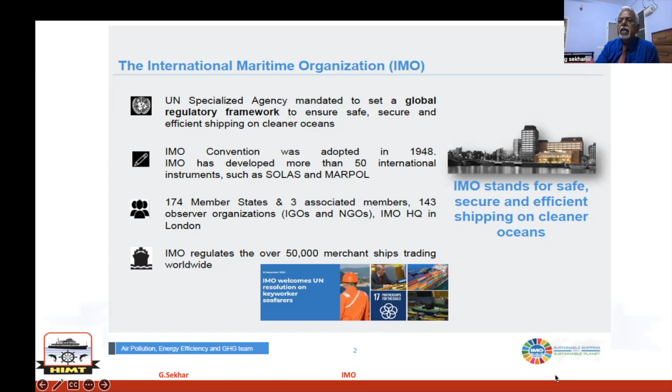But what IMO does is only give guidelines to the shipping industry. The implementation part of it rests with the flag state. So individual flag states need to comply with the requirements of IMO's conventions.

As you can see, this mission statement of IMO is very clear - it's a specialized agency of the United Nations. As you can see, standards of maritime safety, security, efficiency of navigation, and of course pollution control, as well as related legal matters. That's why one of the major committees of IMO is the Legal Committee, apart from your MSC and MEPC, for effective implementation of IMO's instruments.

That's the reason IMO has started auditing flag states by bringing in chapters in both SOLAS and MARPOL, what they call verification of compliance. So IMO is now taking on that role also.

In this slide, you can see how it all started. Look at 1990 - how much is the quantum of cargo carried? I hope you are able to read this - 4,008 million tons of cargo, shown here in orange color. And the CO2 emission - how much is it? 562. Whereas in 2020, almost 2 years back, the cargo quantum has increased threefold, three times.

11,019 million tons of cargo, and CO2 emission staying somewhere around 1,056. You will see the gradient till almost 2010 - this blue line is your CO2 emission and orange line is the quantum of cargo carried. Both go hand in hand, the gradient, the angle is the same.

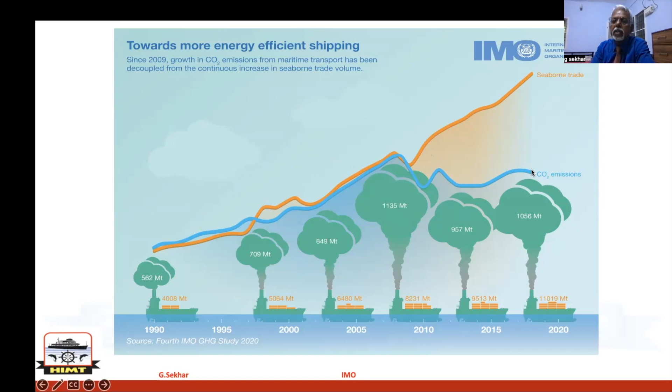But at 2009, 2010, with all the new regulations brought by IMO as Chapter 4 of MARPOL Annex 6, what they call the energy efficiency chapter, they are now able to flatten the curve instead - this is the cargo quantum and this is the CO2 emission. So now they are able to just flatten the curve. But the long-term target of IMO is to make the CO2 probably come down to zero. That's how they are now looking at it.

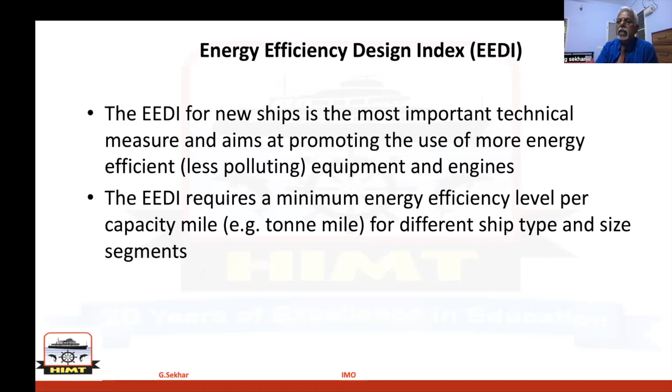Yes, we all know that. So the factors considered are the quantum of cargo carried and the fuel oil quantity consumed, which directly relates to the CO2 emission from the fossil fuel we are using, like IFO, MDO, or MGO, and apart from that, the distance traveled during the voyage. So the formula is given, and both the attained EEDI and the required EEDI are always checked. We always expect the calculated attained EEDI needs to be less than the required EEDI.

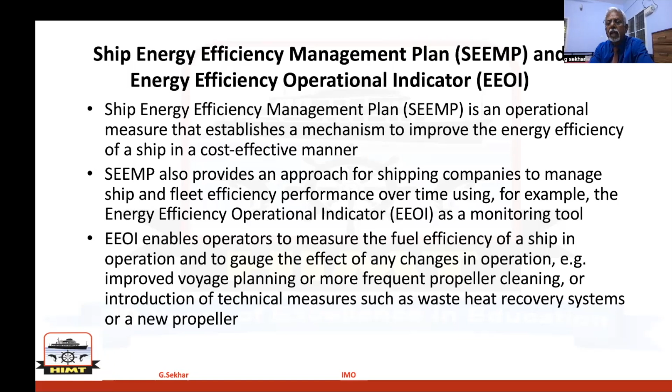So that's about EEDI. And of course SEEMP, and another operating factor we are using as of now on board ships is the Energy Efficiency Operational Indicator, which can be used for any type of ship, whether existing or new. That just enables us to measure the fuel efficiency of a ship, so that if we carry out any improvement methods like improved voyage planning, underwater hull cleaning, more frequent propeller cleaning, a new propeller fitted, or waste heat recovery system improvements, we can see how efficiency improves. So all this is the EEOI which we are very familiar with.

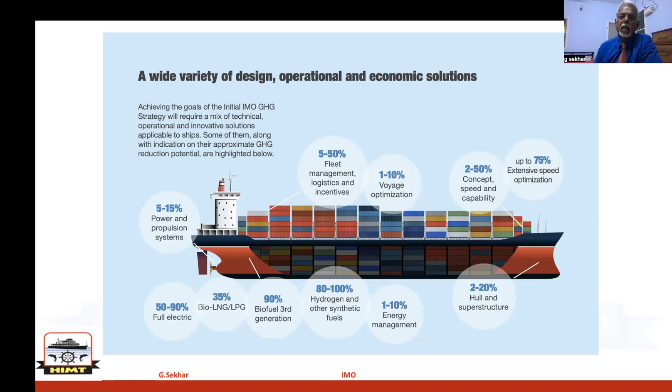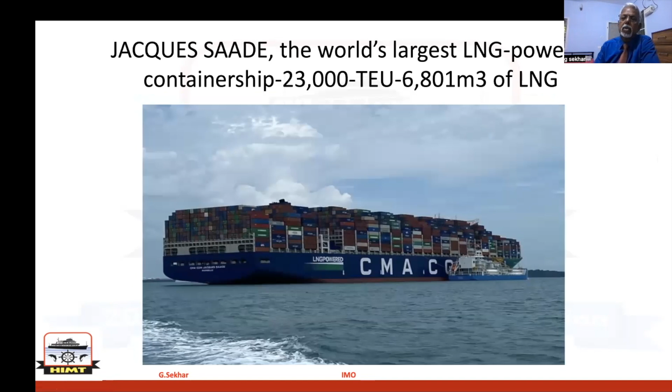Or you can look at this particular ship - it's an LNG powered container ship. It's massive, about 23,000 TEU. The capacity of bunker tanks is about 6,801 cubic meters of LNG.

As I have said, usage of LNG is only the initial step - the reduction you get is only about 25%. But our focus is to completely decarbonize, meaning we need to go further. Should we use ammonia as fuel or methanol as fuel?

Yes, methanol, I mean ammonia fuel is being tried out, and probably new ships will be coming out. A lot of research and development is being done, and they are looking at using the green ammonia concept - NH3, that's what we need. Nitrogen from atmospheric air and H from the water. The processing will be done, and the green ammonia concept is being pursued, with a lot of R&D being done.

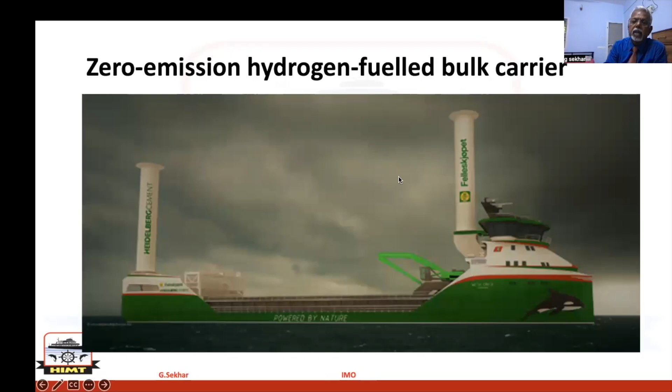Energy will also be harvested directly from the wind through large rotor sails. You can see those rotor sails here - one in the front, this is what we call a Flettner rotor, one right forward, one further up. These are all exploiting wind energy and wave energy. The vessel also has the ability to store excess energy in batteries. This type of development, this greener energy concept, is taking place.

Now let's go back and briefly look at MEPC 75, the short-term measures approved. What they were talking about for 2023 is that for all existing ships of 400 gross tonnage and above, your EEXI certification should be in place. We now have hardly 3 months to go until 1st January 2023.

The comparison is 2008 versus now, 2023. One measure is your EEXI certification - achieved through retrofits, adding shaft generators, reviewing waste heat recovery methods, VFD installations (variable frequency drives), or propeller cap installations. These arrangements reduce fuel consumption, and this is all for existing ships as a retrofit - what you will be able to review and improve upon. That is your EEXI certification.

When looking at CII, the carbon intensity indicator, a lot of operational issues come in - hull cleaning, propeller polishing, voyage planning, weather routing. These are all the operational issues that will get your vessel graded after the survey.

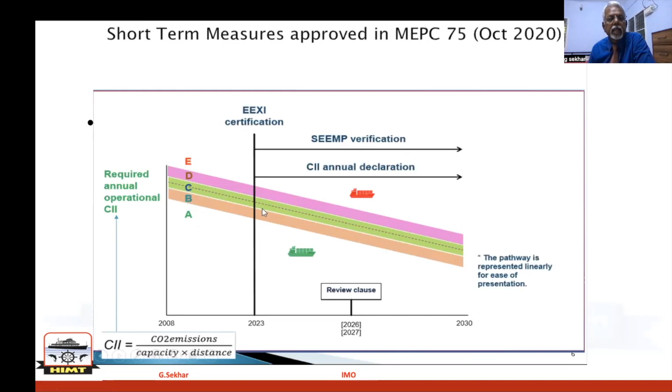Your vessel will be graded A, B, C, D, or E. If you are A, B, or C, you are all right - that means your attained EEXI is less than the required EEXI. If you get D or E, that means you need to do some review. If your attained EEXI is less than the required EEXI, you are fine under your EEXI technical code and International Energy Efficiency Certificate, the IEE.

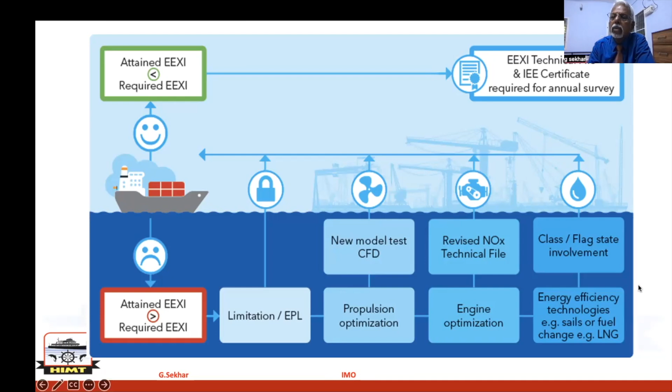But if your attained EEXI is more than the required, that means you are emitting more CO2. So what needs to be done? You need engine power limitation, propulsion optimization, engine optimization, energy efficiency technology, sails, or fuel change - whatever the ship owner of an existing ship needs to consider. Your flag state and class will be involved, providing guidelines to the ship owner on how to improve things to reduce CO2 emission.

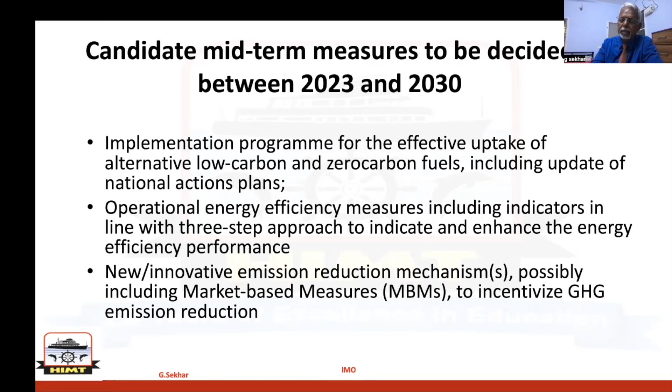Now the mid-term measures, between 2023 and 2030 - EEXI and CII - this is how they plan it: effective uptake of alternative low carbon, zero carbon fuel, which I mentioned, and operational energy efficiency measures, a three-step approach to indicate and enhance energy efficiency performance. Of course, market-based measures for emission reduction mechanisms, to incentivize ships emitting less CO2 - they need to be given some sort of incentive. These are all things in the pipeline which they have recently reviewed.

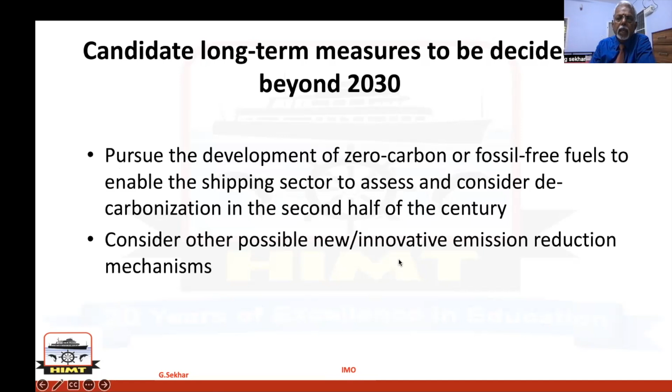Beyond 2030, these are what they call long-term measures: pursue the development of zero carbon or fossil-free fuel, as I've mentioned - fossil-free meaning 100% decarbonized, using hydrogen, ammonia, methanol. And of course, consider other possible innovative emission reduction mechanisms.

Now, in November 2021, MEPC 77 took place. Here IMO agreed to revise its strategy, review and adopt revised guidelines for its short-term and mid-to-long-term greenhouse gas reduction measures, but held short of committing to zero greenhouse gas emissions by 2050 - short of committing to the goal of complete decarbonization by 2050. Now it's 2022, meaning reviews in 2030, 2040, 2050 - probably by 2050 they may get rid of fossil fuels like IFO, MDO. This is the plan.

Now, if you just look at the 78th session, which was done between 6th and 10th of June 2022, the MEPC in IMO looked at these points discussed during the session: revision of the initial IMO greenhouse gas strategy, which was reviewed and revised with midterm new proposals, updated guidance on EEXI and CII calculations, and reporting of EEXI and CII values to the data collection system of IMO, which has been there since March 2018.

This is in line with what we call EU MRV. As far as the European Union is concerned, the European Council has come out with regulations that you need to have EU MRV in place, and then you need to have a document of compliance under EU MRV. Your IMO data collection system is very similar - there they call it DOC, but IMO calls it SOC.

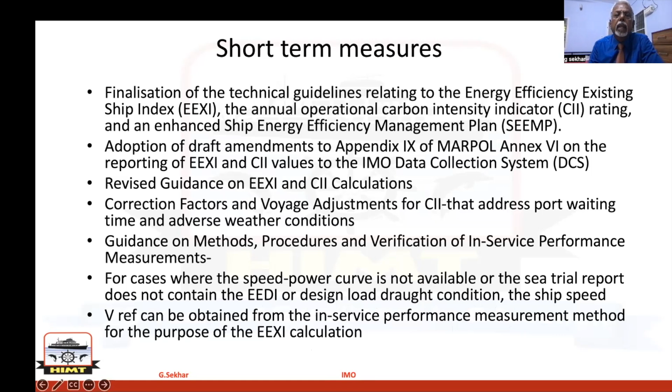Now apart from that, if you look at mid and long-term measures, an increased level of ambition was considered. As I've said, the long-term ambition is eventually to make CO2 emission zero. So also to work together across sessions to develop a concrete proposal for revising the initial strategy by MEPC 80. MEPC 78 just concluded, I think in June they will have MEPC 79, and end of next year they will have MEPC 80. So they want to focus more on the needs of developing countries, especially small island developing states.

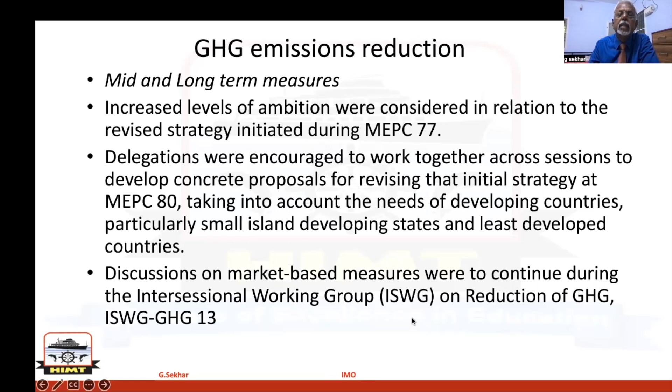These are the issues discussed for reduction of greenhouse gas. Before I close, let's look at what proposals are in the pipeline at IMO. First, they are looking at a levy system. That means, like when we drive a car on the highway and keep paying at the toll booth, likewise a levy system based on greenhouse gas emission from the well, the oil well, to the propeller wake, is to be determined by IMO.

These are all in the pipeline, which may come as regulations at a later date. Also a tax levy system based on CII performance. For ships with CII performance below a benchmark, as you are aware, in the ABCDE rating you need to get either A, which is the best, B the next one, and C the pass mark. In case you get D or E, below the benchmark, you pay a contribution per ton of CO2 emitted in excess of what is stipulated as the benchmark by IMO.

The ships with performance above the benchmark receive a reward. That means ships emitting less CO2 need to be rewarded with an incentive. That's what they are talking about. This contribution is determined by IMO, while the reward depends on the level of achievement of the fleet.

A levy system again, tax-based, on tank-to-wake CO2 emission, where the revenue is partly used to provide a direct rebate to zero-emission vessels. That means when vessels come out with zero emission, they need to naturally be given the incentive. The CO2 price and the rebate to be given to those types of ships is to be determined by IMO. These are all in the pipeline of the IMO meeting.